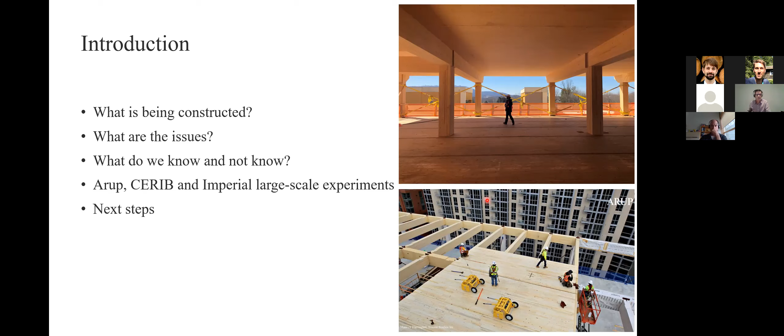So what are we seeing? Well, we're seeing a lot of mass timber office buildings, and I think we're seeing these in pretty much every part of the world. Mass timber has certainly seen a significant uptake in the last 5 years, and that's often to do with sustainability and the desire to have more sustainable buildings. We're seeing obviously a lot of residential, but also a lot more office construction and the desire to have offices with sustainable construction and something a little bit different in the marketplace.

They want to know that it's a timber building, but also want to be able to see that timber. And we know that if we have the timber exposed, we are going to have significant extra fuel, and that is going to impact both the heat release and the decay of a fire if it is to occur.

We know that with large compartments, we typically don't see flashover behavior. So one of the questions for us as engineers, and anyone involved with fire safety of larger spaces where there is structural timber involved, is what is that behavior.

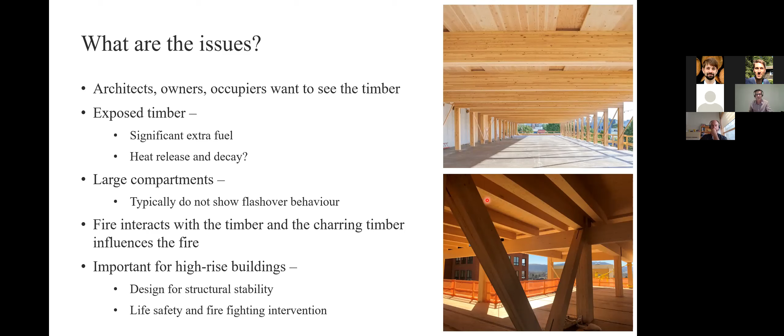So that's a brief introduction to the main issues when looking at mass timber construction, and especially high-rise mass timber construction. What we've seen over certainly the last 5 or 6 years, and potentially up to the last 10 years, is small scale, room scale, and really in some ways large scale, up to sort of 90 square meters, of experimental burns where large areas or significant exposed areas of timber have been involved. We've now got over 40 tests with room or large scale compartments.

Most of these are set up with residential fire loads, different types of ventilation, sometimes walls exposed, sometimes ceilings exposed, sometimes combinations, often mostly with CLT, sometimes with Glulam and other types of timbers, sometimes in combination.

And what we've seen with most of these is very much flashover behavior. The amount of exposed timber has a significant influence on the fire, certainly the growth, and certainly importantly the decay and the heat release decay. The type of timber has an impact as well, certainly where we have cross-laminated timber and issues with glue line integrity, and we see that in the decay phase, and the importance of understanding what happens in that decay phase.

We've also seen that where we want to include the timber, we have to understand that, but where we want to exclude the timber from the fire, we really need reliable encapsulation that prevents that timber from charring and becoming part of the fuel actually burning in that fire.

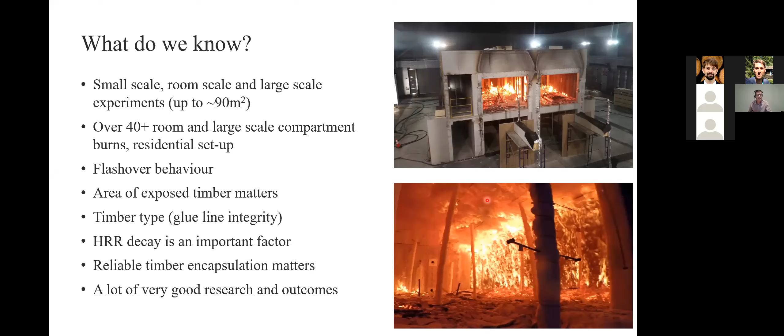So there has been a lot of very good research, a lot of really good outcomes, and a lot of really useful information for engineers, scientists, and anyone involved in research and application of mass timber when it comes to actual structures and fires. But there is a lot we don't know as well, and I think this is important.

This is, in some ways, the important part of where we are now and what we need to be doing: continuing to look at what happens in these larger compartments, because part of the issue is how the fire actually grows in these spaces. For non-combustible compartments, there's been a reasonably well looked at theory on traveling fires and the impact of fires actually moving through a compartment. Now, when it comes to exposed timber, we don't understand whether that theory is still applicable. We have some ideas that it may be, but we've also got some significant concerns with that.

There is quite an issue with how ventilation impacts the actual fire and the spread of fire, and this whole aspect of the decay as well. Smouldering behavior in timber is also something which has not been very well studied, and something we need to understand a lot more of, certainly as engineers and researchers, to apply the engineering, especially where we are looking at taller buildings.

How thermal penetration occurs through timber, and how it is potentially delayed, is very important for vertical load carrying members such as walls or columns. Certainly a very important aspect to understand what occurs, especially in that decay period.

External flame projections we have some idea about, or understand where that occurs, but we need certainly more data on that. We certainly need to understand more about firefighting tactics. There is some good work on that, but again, more would be useful.

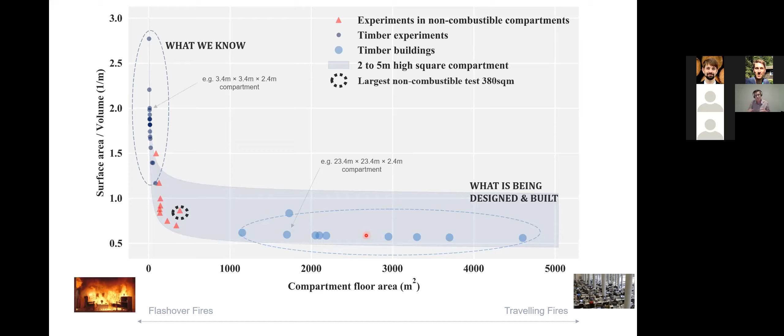But we need a better understanding before we start to scale up some of these tests to be able to take them into what is actually being designed and built, especially when we don't quite understand the issues between flashover fires and traveling fires.

This main issue is part of the motivation for ourselves working with CERIB and Imperial College to fund these large-scale open plan office experiments, because we are interested primarily in the fire behavior. We want to understand how large areas of exposed CLT influence the fire in these large compartments.

What we're also doing with these is there's been previously compartment fires carried out for exactly the same size building with non-combustible ceilings, looking at traveling fires. So we have a baseline where we've got two current experiments, 380 square meter buildings, and understand what the traveling fires were with certain fire loads and certain ventilation. We can use those as a baseline, and that has become the base for these experiments.

The aim of these is to look at the differences between non-combustible and combustible ceilings and understand the difference of where the timber starts to influence the fire.

Also, as part of this, we didn't want to try to do too much. It's important to understand that a lot of other larger scale experiments have taken on a lot of goals, simply because often they've been related to code changes or getting certain amounts of experiments carried out trying to get the most out of them. In some ways, we are very much focused on the fire behavior, and that's important here, the importance of getting the information out.

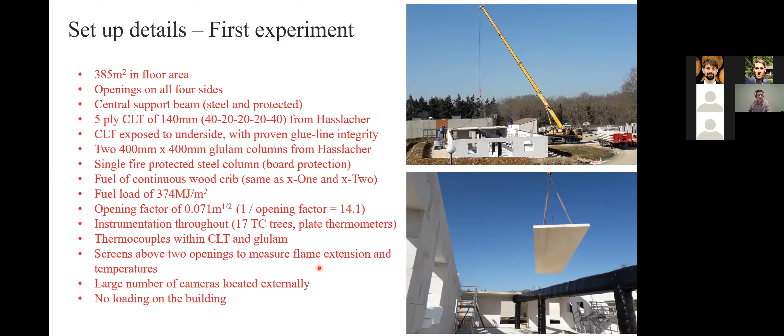Putting it together: masonry walls, openings - as I said, openings at the far ends, and both sides had basically similar openings, with larger openings at one end.

Very, very happy Mohammed today, who in the last couple of days has been awarded his PhD. So congrats to Mohammed, and call out to you, well done.

The wood crib being put together - we had a short area of about 4 meters at one end of the compartment where we didn't have the wood crib, and then the wood crib was continuous all the way down the compartment. That's just the ignition sequencing about to start.

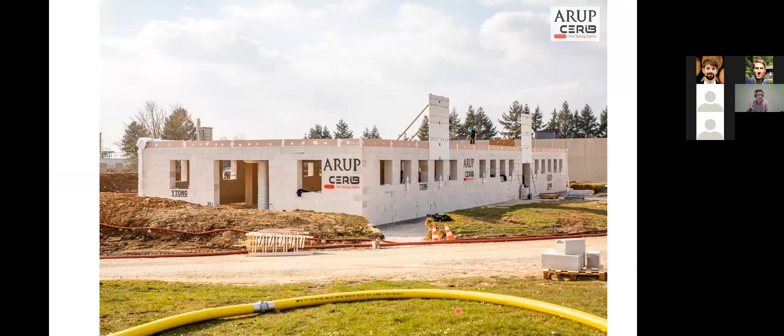That was the building on the morning. Screens, as I said, over a couple of the openings - one over a window and one over a door - to be able to see how the flame projections occurred. CLT in place, and the ignition started at this end. At this end we have a larger opening as well.

In this situation, looking from this point, we have a very well organized wood crib. Its primary aim is to get a lot of heat and get that burning very well, and we have quite a lot of ventilation. The issue is, even before we started this test, there was often a lot of debate around how much ventilation we should have - is this over ventilated or under ventilated? Part of the process here is it's hard to tell - we'll actually carry out this experiment and see how we go.

The actual ventilation for this part is exactly the same as the initial x-One tests that were carried out in Poland, with published information on those. So that was the baseline for starting this test.

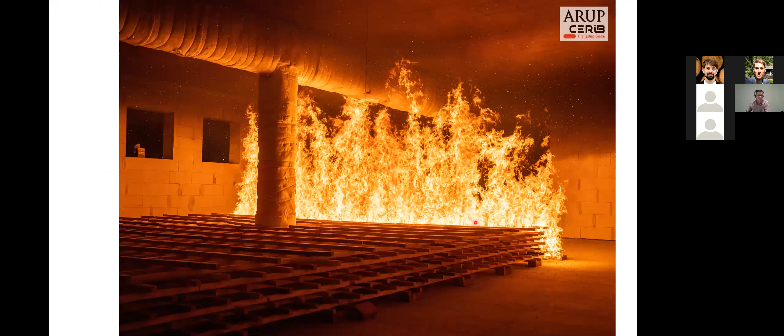Just an image as the fire has just started, and obviously starting to get into the wood crib. You can see the exposed CLT, and this is the protected structure which sits in the middle, allowing the CLT to span the whole way across. This is just a steel beam protected by mineral wool, which we wanted to use for each of the additional tests later on.

Black and white, or quite a color enhanced image through the window - you'll understand why these images were slightly different as we move along. Obviously the plume is just starting to take hold, we've got some ignition starting, and the plume is starting to move down the compartment with just a little bit of discoloration at the exposed CLT. As you can see, the wood crib hasn't ignited at all.

A few seconds later, we've got significant burning of the timber directly above the fire plume itself, with the jet starting to move well down the compartment now. Again, as you can see, no ignition of the wood crib as yet.

A few minutes later, you can start to see exactly what is going on here. We've got full ignition of the wood crib in this area, full ignition of the CLT in this area, and full ignition in this area as well, as the ceiling jet has moved along and we've got preheating - we've actually got ignition of the CLT. Remarkably, no actual ignition of the wood crib along here.

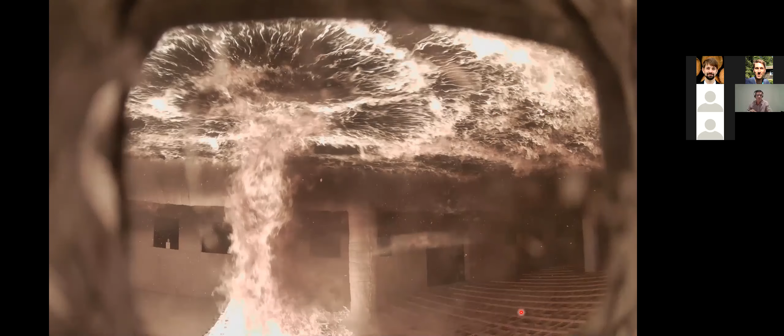Watching this live, we had no idea that this was the actual situation. Our view was that we were getting everything burning at once, and it wasn't until we started to look at this data afterwards, and looked at some of these photos, that we were incredibly surprised to see significant ignition on the ceiling, but also a lack of ignition of the wood crib at this point.

A matter of a minute or so later, we get enough radiant heat in place that the wood crib starts to ignite, and the fire starts to spread and move down the compartment. This initial stage was really interesting, in the fact that we got that spread along the ceiling, certainly a lot faster than we were expecting.

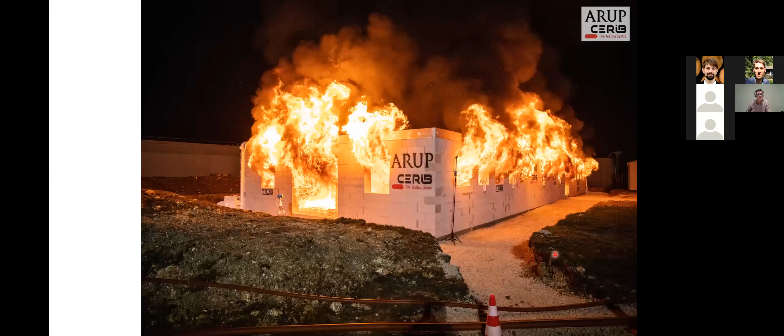Just as an image back from outside, within about 5 minutes of ignition we had pretty much flashed over the whole compartment — this is a 385 square meter compartment. You can see the wood crib burning, and the whole compartment completely flashed over with everything burning. We were not expecting that completely. We expected some form of continuous fire, but to get to this point was certainly surprising, and also interesting from the point of view of how the fire actually developed and continued to grow in this space.

A few more minutes further along, ignition has occurred at this right-hand end, and we're starting to get some decay in the fire at this end, at the other end of the building where the fire has moved down to. We've still got, in some ways, full development of the fire and somewhat flashover conditions at this end, with full flame extension and the fire completely engulfing every part of the structure.

Just an image inside showing the wood crib starting to burn away, starting to be consumed. There were two timber columns — one located centrally, and one located more towards one end. Part of this was to understand how these columns actually responded, which is quite an interesting aspect in itself, looking at the timber columns and how they responded to the fire.

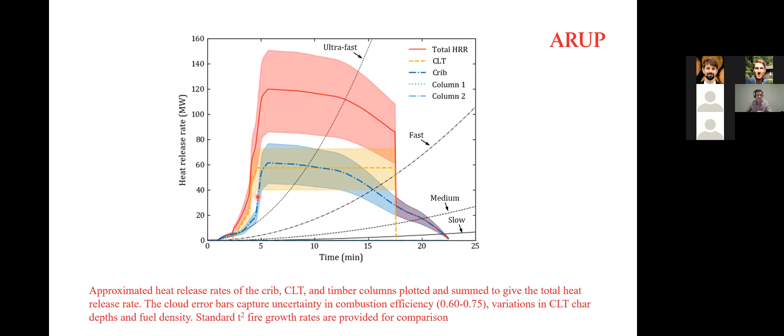Interesting enough, as far as fire growth goes, we plotted the T-squared fires here — the ultra fast, fast and medium type fires — and you can see we got very fast growth. We have to be pretty realistic about the fact that we had, in some ways, a perfect fuel, and very good openings which were open right from the beginning of the fire. So we were expecting to get very good growth with regard to the speed of the fire. That certainly did occur, and it's very evident that when you have exposed timber and the right ventilation conditions, you will get very fast growth.

As far as temperature goes, just a quick snapshot of the temperatures over a short period of time, from 5 minutes to about 6.5 minutes. This is along the centerline of the compartment, and you can see snapshots of the flaming occurring at the same time, along with the temperatures moving through the compartment.

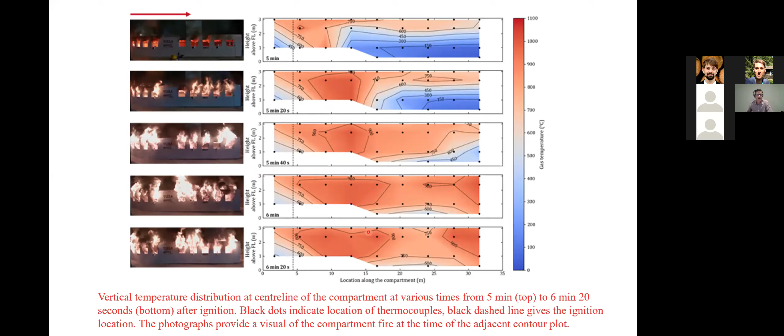We have a situation where we don't have enough ventilation in that space, and this is one of the aspects we looked at and realized that even though it was a very well ventilated compartment, there certainly wasn't enough ventilation, and we are getting a situation where the temperatures are peaking in an area which is slightly below.

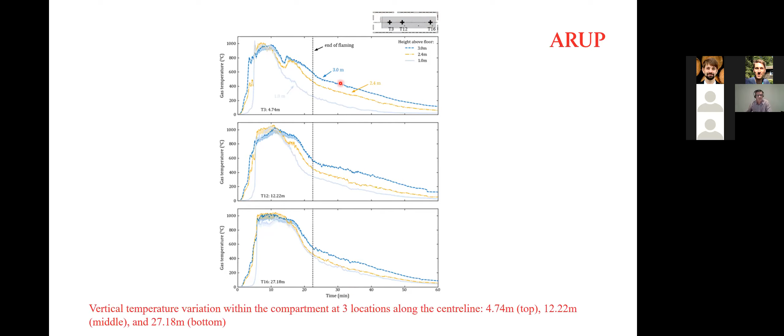Another interesting aspect is that at one end of the compartment, we've got quite a reasonable separation of temperatures between 1 meter height and 3 meter height, with in some ways a 2-zone approach. At the far end of the compartment, near the ignition where flames move in this direction, that separation doesn't really occur, and we've got fairly consistent temperatures across the whole height from 1 meter to 3 meter. Decay rates are similar, but that separation in temperatures is quite different along the actual compartment.

So what's next, to wrap this up: we're in the process of writing a paper which we'll publish, providing results on what we've seen so far from the first experiment. We're then looking at separate papers to dig into more detail on some of the other issues we want to explore.

We're in the process of setting up for our second experiment, which will occur in the next 2 weeks. A lot of work is going into getting that ready and prepared. We're basically having exactly the same situation but with half the ventilation, primarily knocking out every second window or every second door, with everything else identical. So it's all about understanding the impact of ventilation on those fire dynamics and comparing the two. At the moment, this is supporting 2 PhDs at Imperial.

We are considering a third test and trying to understand what that will consist of and what will be important for that. I think that will depend on what comes out of the second test, as to how much we need that third test and what the variations will be. There's certainly a lot of work to digest, and we're considering continuing to work on that, and we will be for quite a period of time as we move forward.

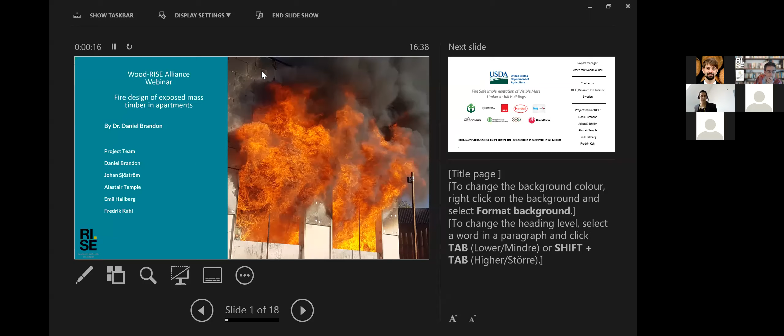Let's see, I see you. Yes, can you hear me? Yes. Good, can you see the screen? Yeah, but I see this in presentation view or speaker view, with the next slide—you have to click something. Yes, it should be fine now, right?

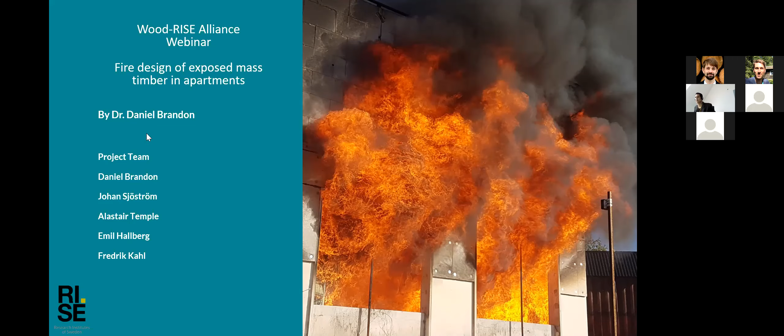Looks great. Good, thanks. Thank you, Pierre, for the introduction. This presentation will be about fire design of exposed mass timber, and I will focus on apartments, in relation to the previous presentation. We did aim to get knowledge for office buildings as well, but the focus of this presentation is apartments. I am presenting results of a project, on behalf of the whole project team.

The project I present results from is called Fire Safe Implementation of Visible Mass Timber in Tall Buildings, funded by the US Department of Agriculture, US Forest Service. The project manager is the American Wood Council, and RISE is the contractor. We have material sponsors: Katerra, KLH, Henkel, USG Knauf, Boise Cascade. We got additional support from the Softwood Export Council for transporting products from the US to Sweden. We also received financial support from Brandforsk, the Swedish Fire Research Association, which paid for additional measurements outside the compartment and analysis of that.

On this website we publish all information. At the moment we just have the summary report. The final report is coming soon, and we'll have other reports, one about predictive modeling and another about repairing fire damaged CLT, a case study of repairing.

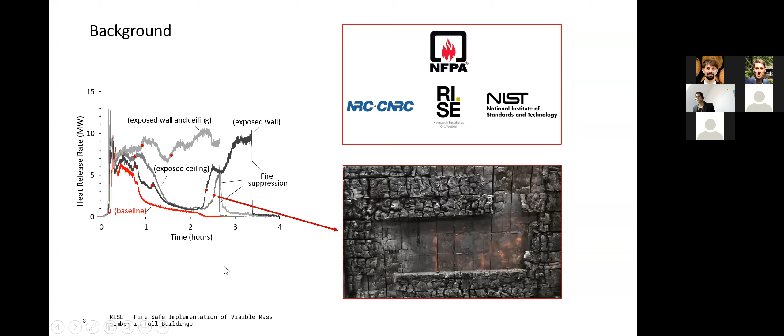By now there are some standard tests in the US and in Canada. There is a requirement for CLT to withstand a full-scale compartment fire test without reheating of the fire, required in ANSI APA PRG 320 since 2018. In Europe, we can expect a standard test in one of the annexes of the next Eurocode 5. Both of these tests aim to avoid glue line integrity failure, and that would change the interaction of the timber with the compartment fire significantly.

That's why we conducted these compartment fire tests. The main objectives are to design and perform five compartment fire tests with PRG 320 2018 compliant CLT. This standard has a test that aims to rule out glue line integrity failure. We performed these compartment fire tests with a varying amount of exposed mass timber areas.

We assess these fires against a performance criterion where a fire should decay from the onset of decay until at least 4 hours after ignition. This assessment criterion was also used for previous changes in building codes, and therefore we thought it was good to implement it in our research as well.

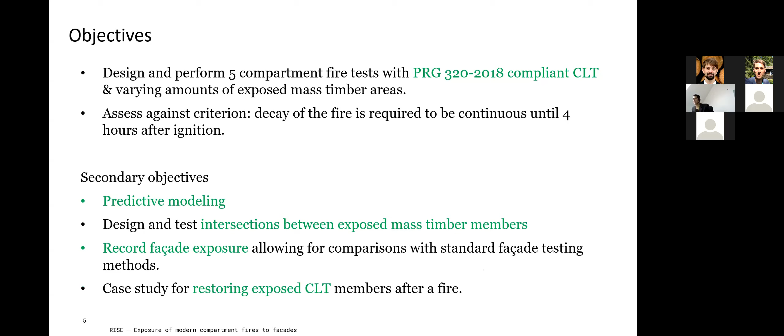Going one slide back, the main objective is to design and perform compartment fire tests. The first step of this is to design the compartments. In this study, we aim to get a severe but realistic scenario. As David already said, ventilation is a very important parameter, and for this probabilistic study we did a survey of which opening factors, which ventilation openings, you could expect during a fire.

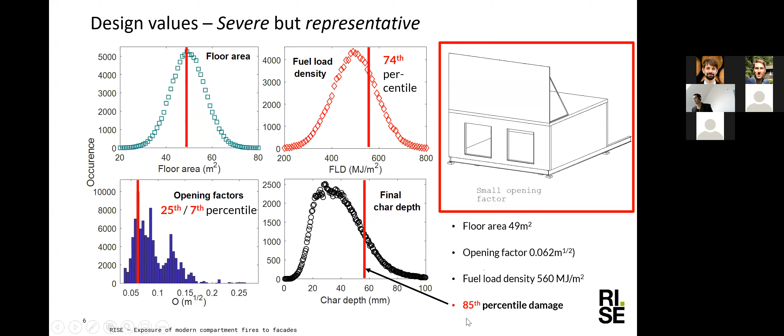We looked at modern multi-story buildings made of all kinds of materials, but also specifically an additional database on timber buildings. We got the distribution of opening factors that we could expect. In the probabilistic analysis, which I cannot go into detail on today, we aimed to get a higher percentile expected damage in relation to the range of modeled fire scenarios, using 200,000 modeled fire scenarios with a relatively simple model. Using this probabilistic analysis, we aimed to select a scenario that would lead to relatively severe damage.

That analysis resulted in a smaller opening factor. We also included a test with a larger opening factor, which would correspond much more to open office spaces in the database. So the purple distribution of opening factors corresponds to office spaces, and we can see that the range is much higher than

These are the configurations of the tests. There were several different areas of the structure protected and different areas exposed. In all tests, we had an exposed CLT ceiling and an exposed beam, a Glulam beam underneath the ceiling.

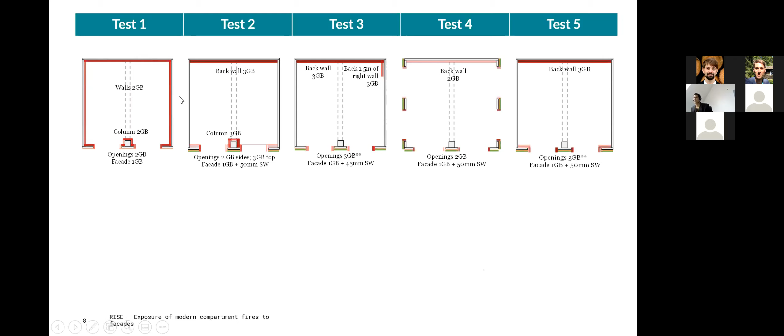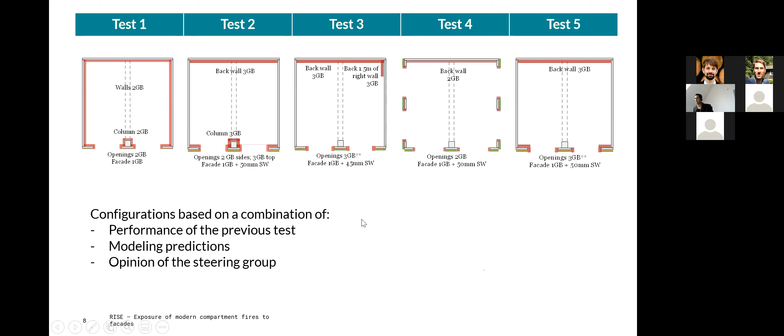We had varying numbers of layers of gypsum boards, and the one test that we did design in advance is test 1. All subsequent tests were designed during the test series based on these three things: the performance of the previous test, modeling predictions, which has been quite useful and reasonably accurate. Then also discussions with the steering group have led to the decision of which configuration had to be tested.

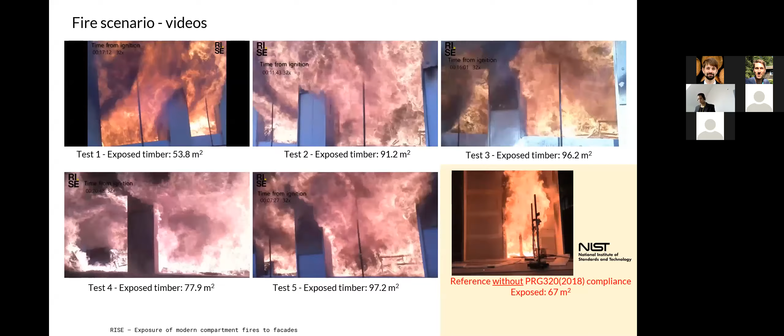Here we see all fires from flashover, from the start of flashover. Test 4 decayed relatively quickly. That is due to high burning rate, but also a lot of cooling effect due to larger openings, which does correspond to our data from office spaces. Then we have test 1, where the ceiling and the beam was exposed, and thereafter 22 minutes of flashover, the decay started, and that took 6 to 9 minutes longer for test 2, 3, and 5, which had significantly more surface area exposed.

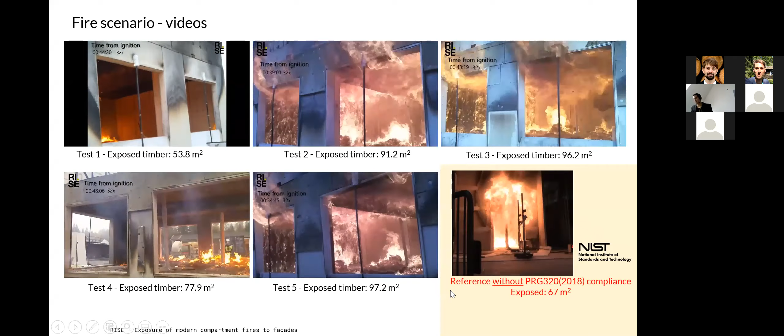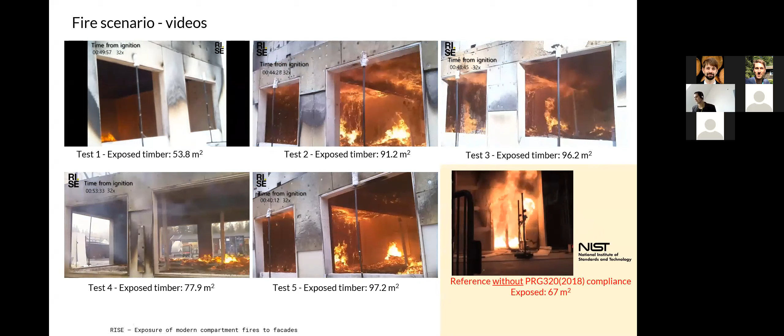As a reference, I included the test done at NIST, and these videos are also made by NIST. This compartment, which I discussed before, had CLT that is not compliant with PRG 320, and fire bond line failure was seen in 2 layers in this test.

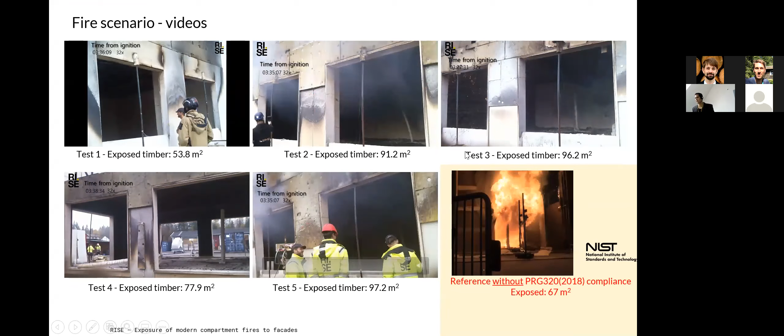Now we go to the end of the test, and we see that test 1, 2, 4, and 5 decayed. They decayed until the 4-hour mark. In test 3, we had reheating of the walls, and despite the similarity between test 3 and 5, there was a different outcome. The significant difference between test 3 and 5 is that in test 3 we had exposed wall corners, exposed walls intersecting at a corner, and in test 5 we didn't have that.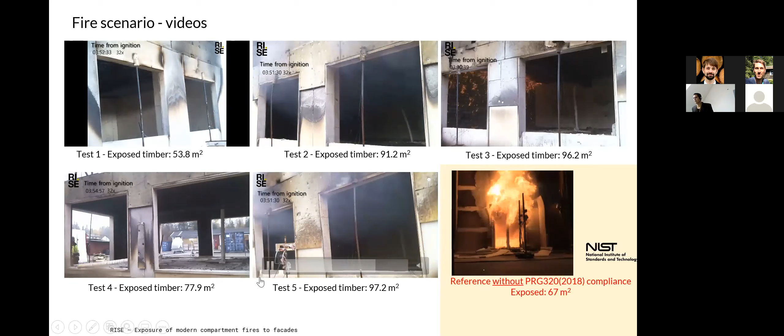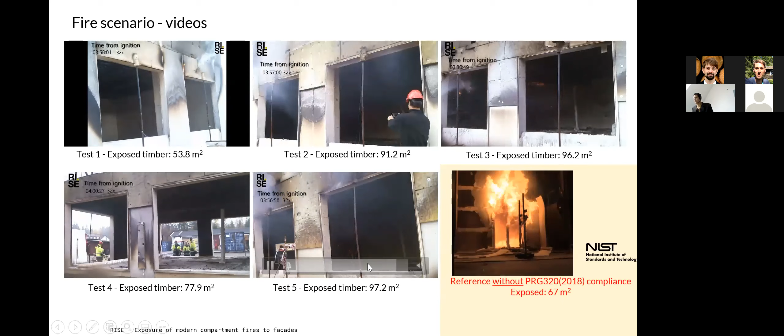In this corner we saw, in test 3, in the bottom of the corner we saw increased damage. In test 5 that was not the case, and all corners in test 5 had at least one surface of gypsum board protected wall. As a reference, I included this previous test with CLT that doesn't comply with the current PRG 320 standards, and you can see that it has a significantly different outcome.

Just to emphasize that there was a significant difference in terms of where the CLT surfaces were, and we have seen a lot of signs of the walls in the corner at the bottom re-radiating to each other in test 3. That wasn't the case in any test where at least one wall was protected in a corner.

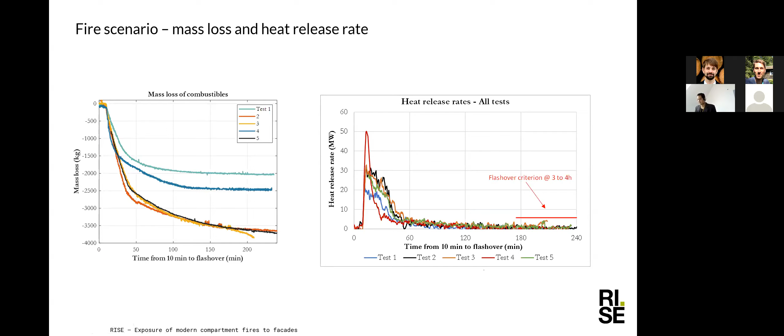Some results: we determined the mass loss of the floor. We determined also the mass loss of the compartment itself, everything except for the floor. The idea was to get information of the mass loss of the fuel load on the floor and the mass loss of the structure separately. We calculated the heat release rates based on the heat of combustion of the fuel, and that is shown here.

We also measured the internal conditions with multiple devices, thermocouples, but also plate thermometers. The plate thermometer temperature is often used as a proxy for thermal radiation, which is actually the most significant mode of heat transfer at fire temperatures.

Here you see the charring depth in the ceiling after all tests. It should be noted that the char depth in the bottom of the compartment was generally higher. However, because the ceiling was exposed in all tests, it allowed for a nice comparison. This is actually the best comparison we have when it comes to char depth of all fire tests.

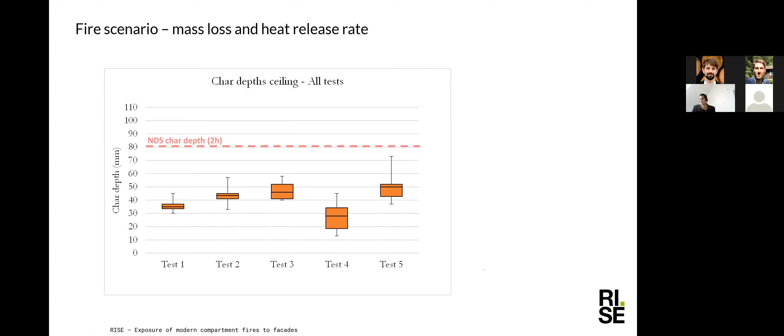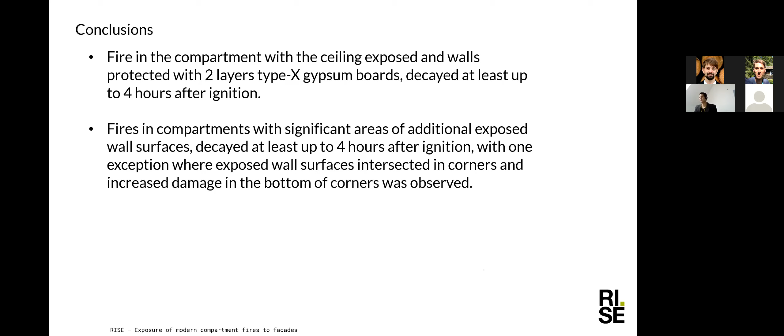That was a very short, brief selection of the results. The conclusions related to the results I showed today: the fire in the compartment with the ceiling exposed and walls protected with 2 layers of type X gypsum boards decayed at least up to 4 hours after ignition. Fires in compartments with significant areas of additional exposed wall surfaces decayed at least up to 4 hours after ignition, with one exception - test 3, where we had exposed wall surfaces intersecting in multiple corners, and there we saw increased damage in the bottom of the corners.

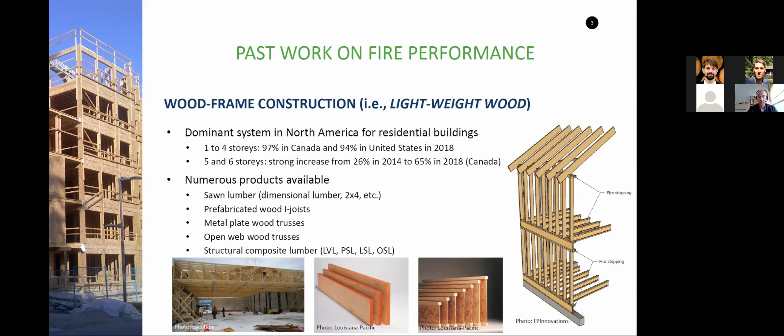There has been a long list of tested assemblies, either wall or floor, that has been exposed to standard fire exposure. I'm using ISO 834 as the reference, but other countries have other standards for fire resistance. There has also been some compartment fires to assess the fire dynamics in this kind of construction. All of these tests have allowed us to evaluate the effects of various design parameters.

Wood frame construction is not necessarily a very complicated system, but we wanted to know the effect of the gypsum board - North America would be type X, European would be type F, or some other classification. The tests have allowed us to understand the effect of, for instance, resilient channels on the performance of the gypsum boards, and also the insulation, namely for wall assemblies where insulation plays a significant role. From all these tests, what we know is that wood frame can provide significant fire resistance way beyond 2 hours, and there have been a number of tests to demonstrate that.

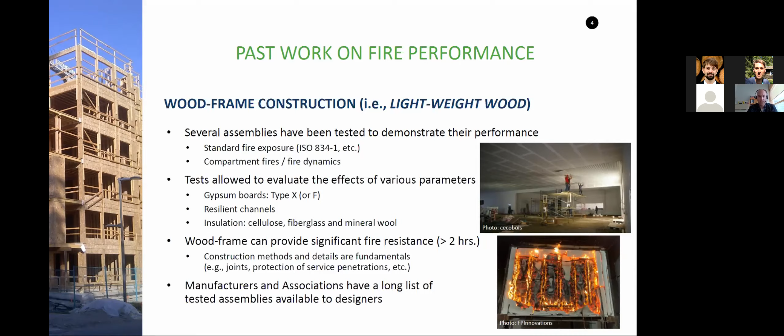Essentially, manufacturers of wood frame assemblies and associations have all of the tested assemblies available to designers. It's just a matter of asking, and they will be more than pleased to share the info with you.

All of these tests have allowed the development of a number of calculation methods over the years. In North America, we have what we call the component additive method. This method is currently limited to 90 minutes of fire resistance, and it essentially consists of adding the contribution of the various components - you add a time assigned to a gypsum board, the time assigned to the wood joists or wood studs, and a time contribution for the insulation, and the sum gives you the fire resistance. So it's really straightforward and easy to use.

There also has been a model developed in Eurocode 5, published in 2004, and section 5 specifically deals with wood frame. The method there is limited to an hour, to 60 minutes, and it allows you to determine the load-bearing function or separating function. So Eurocode 5 has quite a bit more sophisticated approach, so that you can really evaluate whether the load-bearing or separating function is needed.

The other type of system I'm presenting here is post and beam construction - perhaps more of the traditional system that we used to see - and also mass timber, which is more of the trend now related to timber construction, especially in the case of tall buildings, which would use mass timber construction.

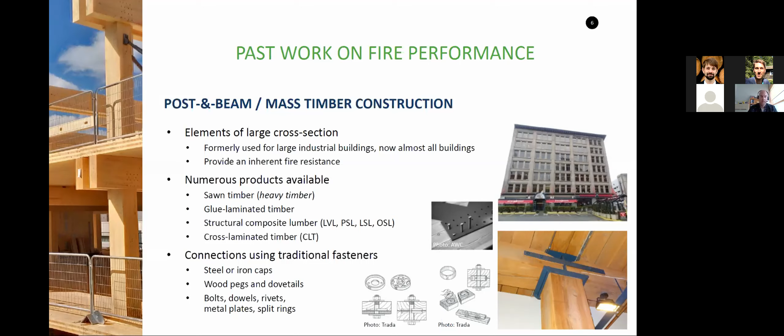This type of system also uses connections that are, I would say, more traditional fasteners. We've seen steel and iron caps, as you see in the picture at the bottom right. We have seen wood pegs, dovetail connections, bolts, dowels, rivets - so all of these, I would say old school, connection types have been used in this category.

Again, similar to wood frame, these products have been tested for standard fire exposure. There have been some compartment fires to assess the fire dynamics and the exposed surfaces - David and Daniel just presented the latest info. All of these tests throughout the years have allowed us to develop a lot of parameters.

Obviously the first one that comes to mind is the charring rate. There has also been a long list of studies to assess the effect of density, moisture content, heat level exposure, as well as the thermal gradient inside the timber once it's being charred.

There has been some work to develop thermal properties - these are mostly used in advanced modeling, like finite element modeling - but at least there has been some work to derive those properties, which are not really obvious because at 300 degrees Celsius, everything is consumed, so it's difficult to develop properties beyond that.

We also have a long list of combustion properties - ignition temperature, ignition time, pyrolysis, mass loss, heat of combustion, smoke, and different other types that could, for instance, come out from the cone calorimeter test.

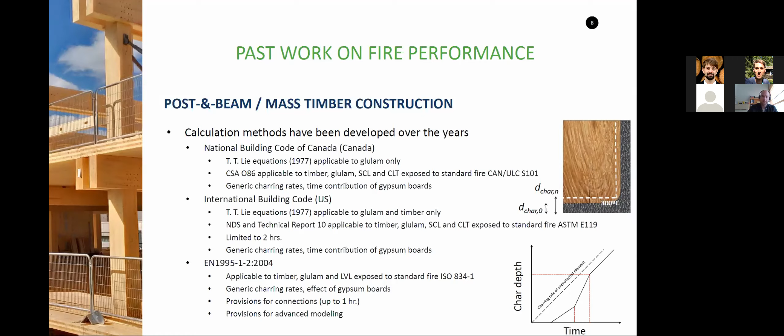So those were where we came from and what we know. Now, what we're currently working on for the past few years, and most likely a few years after, is to continue to study the fire performance of different other types of products and systems. There are and will still be new materials and systems being developed, so we need to know essentially all of their fire performance, whether it's combustion properties, fire resistance, flame spread, whatever. There will always be a need to evaluate these new materials.

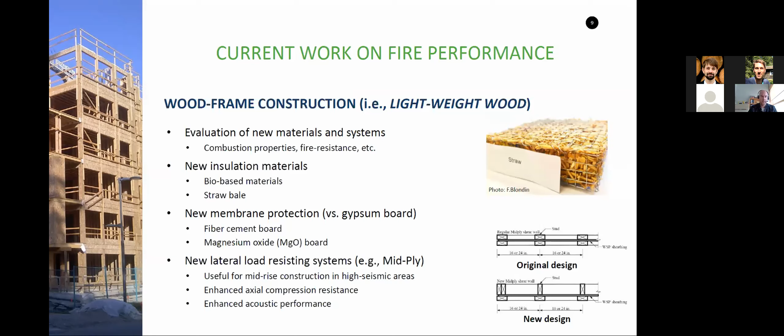With the push to 5- and 6-story wood frame construction, we also need new lateral load resisting systems. One example is the mid-ply shear wall that FPInnovations developed a few years ago. This type of shear wall, as you see at the bottom right, allows the shear membrane to be solicited in double shear, which increases its capacity. So it's useful for higher buildings, or wood frame buildings that would otherwise be in high seismic areas. We changed the configuration of the wall, so we need to focus and test the assembly to assess its performance.

What we're also seeing in the market is a change in wall assemblies to meet various types of demands. The change that we're mostly seeing is the need for energy efficient exterior walls.

So something that would either be thicker cavities, more insulation, or insulation outside of the wall as opposed to inside. That changes the overall performance and also needs to be assessed as to what is the effect from moving one component elsewhere across the wall assembly.

We also see high capacity walls for compression loads. There could be staggered stud, so not a standard one row of stud. We could see walls with engineered wood-based stud, like structural composite lumber, which has not been tested per se, so we need to know if there is a difference. And some walls with enhanced acoustic performance, so maybe now new assemblies with gypsum membrane or other types of membrane, but that are not necessarily the traditional gypsum board and resilient channel.

From all of these recent trends, this has led to refinement of existing methods. I would say for now, the most change will be coming in the Eurocode 5, which should come out somewhere between 2025 and 2027. There will be a significant change in this method, and Joachim will present more details later. One of the major changes is you will have thermal properties for insulation materials and gypsum board, which were not in it before.

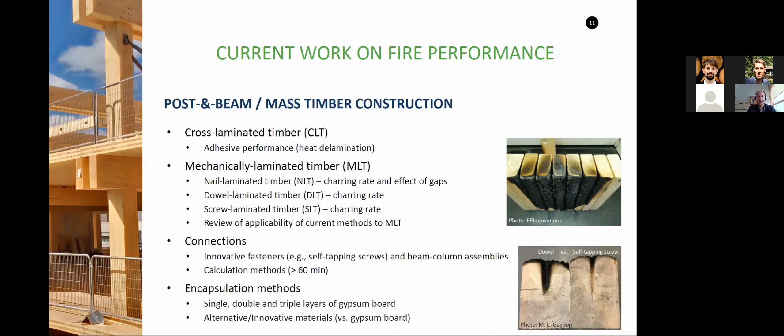Also current work, compartment fires. David and Daniel have presented some of the ongoing or almost finished compartment fire work, but there has been significantly more testing in the past few years that was not necessarily presented in this webinar.

We're also still doing some testing to see the effect of non-delaminating products. Most of the previous tests on compartment fires were, as one commenter pointed out, made with CLT that exhibited delamination, and now we want to see what's the effect of the non-delaminating products.

Fire safety engineering work is ongoing. The important thing for now is to see whether the general principles of fire safety engineering are applicable to timber construction. David alluded to the number of uncertainties that an engineer wants to get rid of. So what needs to be done to make sure we eliminate these uncertainties?

One priority is to continue developing thermostructural models. For now, what we've seen is usually sequential coupling: one does the thermal model to see the heat transfer inside an element, then puts those results into a structural model. Two-way coupling is different and more sophisticated, but the sequential approach is reasonable for now. These models are usually for single elements like a column or beam, with some modeling showing connection performance as well.

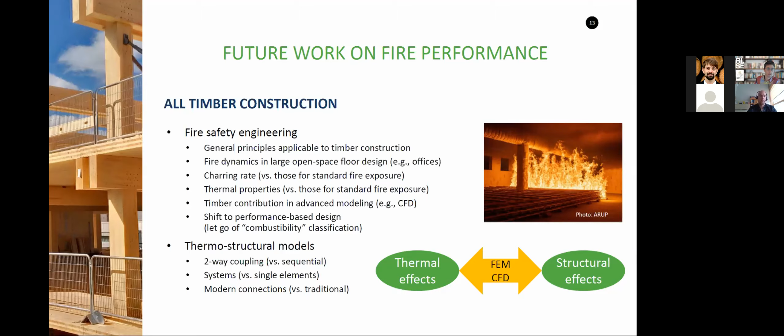Future work also includes modeling - I'd say now two-way coupling, so that at every time step thermal and structural models talk to each other. Also, we could look more at a system approach as opposed to an element approach - how a beam and column interact together, or maybe a full compartment that could be modeled. And also modern connections - there are tests demonstrating traditional fasteners, bolts and dowels, but now we want to know more about modern types of systems.

Please, Christian, we are running out of time. Yep, that is my last slide, Pierre.

And lastly, still of great interest these days is fire safety of facades. What test method should we use? There's a number of those already in place in many countries. And what would be the risk mitigation strategies for these facades?

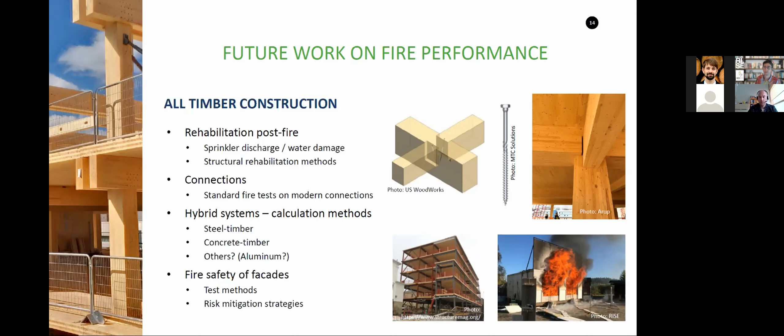In conclusion, I'll stick to the main points: wood frame construction is very well understood. Post and beam construction and mass timber is relatively well understood for now. But there are many key aspects still misunderstood by the design community, whether building officials, firefighters, or insurance companies. Performance-based design is gaining popularity, and timber design needs to fit into performance-based design like any other material, so we need to develop what's left to support that approach.

Yes, so I was asked to present something with respect to compartment fire design in Eurocode. And I took the opportunity to show you the current status, a comparison with the actual version and the coming version. Unfortunately, I have to inform you that we have to wait some more years. The Eurocode in its next generation is to be confirmed and approved 2025 to 2027.

So let's wait some more years. But I think the draft is spreading, and I think why not use it by now? So let's start. In my presentation, I will go through the evolution of Eurocode and show you some of the differences. I will give you a design model overview when it comes to fire design.

And we will have a look at what's available and valid also for timber. Then we will have a deeper look into the consideration of structural timber. Why should we do that, and how can we do it? I will give you some insights on the physics and how we want to apply that. And close to the end, we will have some application examples.

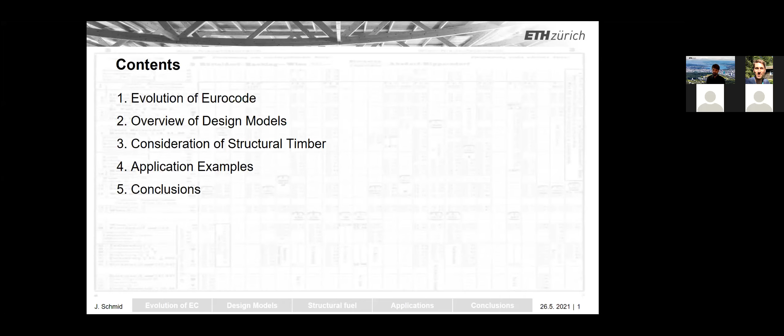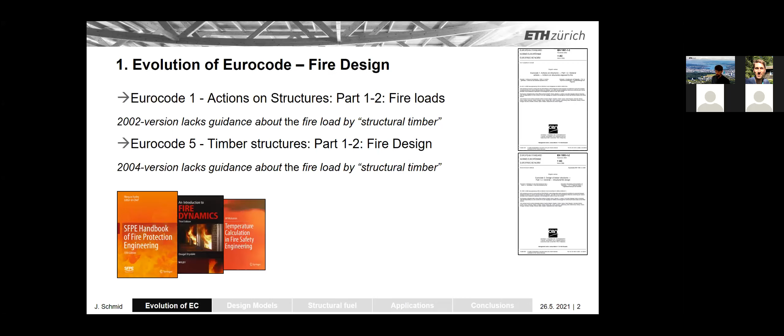So when we have a look in Eurocodes about fire design, and we want to know more about the structural fuel load by structural timber, then we will find in Eurocode 1, which should be our first knowledge point, that we do not have anything there. It said please consider fuel if it's the interior or the structure. However, also Eurocode 5, same sentence, just a different release date. There's no guidance given about how the fuel by structural timber, or the structural fuel as I call it, can be calculated. So the only option you have is to consult guidance documents, books for fire in general, or well available information about how timber reacts and behaves in fire.

And there is still a web page open for the COST Action, the previous one now finalized already for 2 years, but content will be extended and also transferred to another web page called Fire Safe Use of Wood. So I will invite you to check sometimes when and where we will do some updates. I would also refer to a Canadian handbook, which is quite useful, and some very recent research done in UK with the STA group.

Now, evolution of Eurocodes. I told you Eurocode is a very good tool, but it should solve everything, and this is in fact at the moment expected from Eurocode. You should deal with timber frames, post beam construction in rectangular shape, irregular shape, and also CLT. However, to be honest, CLT was not really included in Eurocode, and partly rules have been incorrectly used and applied on CLT. But this is now to be solved and becoming much better in the next version of Eurocode.

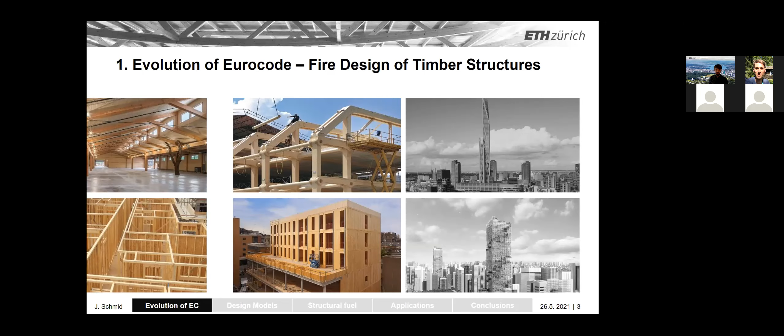What we will not do, and will Eurocode never deliver, is clear rules how to build a skyscraper out of wood, because for that you need special expertise, which is also valid for complex and larger structures. But guidance on about 80% of the buildings should be implemented in Eurocode. And that was also the task of the project team where I was a member of when we did this writing of the Eurocode draft, which exists now.

Having a look at that and comparing it to the old version. So 2004 is the old version, and 2025, I'm quite an optimist, that is the new version. Looking at the page numbers, I could identify some interesting spots here, and that is one, the mechanical resistance. It grows because we have now more products involved, CLT, quite a large chapter, but also more small elements, I-joists, which have not been involved or incorporated in the 2004 version, that is now covered.

On the other hand, and that will be the content of my presentation today, the next slides, is non-standard fire design. This means that not everything is invalid for non-standard fire design, but most of the design is expected also in the future to be done for standard fire. For example, detailing will be an issue for any of the design. And also external flaming, which is a new chapter, is probably something everybody will be interested in.

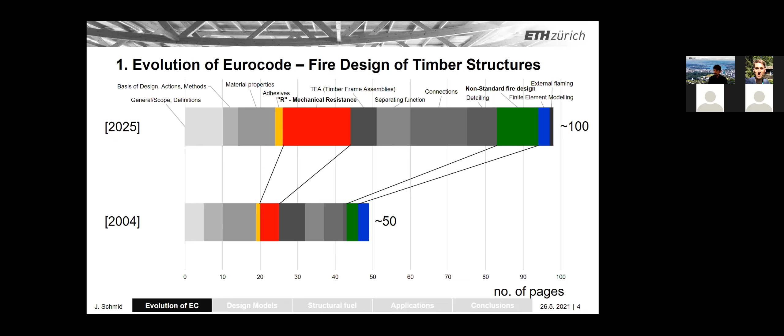Having said that, I would like to point out that Eurocode is just one piece of the full picture you have to consider, or an engineer should use and take into account when designing a building or doing a member verification. There's still testing around, and more importantly, there's still these building regulations you have to follow, where you will find proper guidance, hopefully. And if not, you can consult similar papers and manuals given by the associations of timber industry in your country or also abroad.

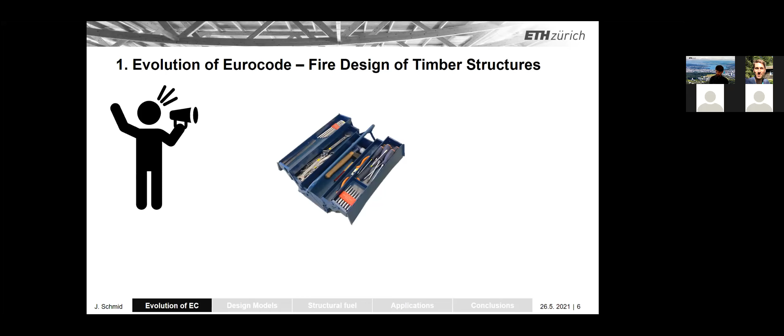Now, reporting from the project team dealing with the draft of Eurocode: we were given the old Eurocode with some tools, and we were also addressed by wishes that everything should be more accurate, everything should be more easy, and all models should be fit for the future. So it was a difficult task, but we did our best in rearranging tools and putting more tools together, and these tools can be used in the future by engineers to answer questions—not all of them, but more and more. I think they are good tools, and I'm very happy to present Eurocode very soon to you. Please send comments to WG4 if you are not happy and see some further room for improvements.

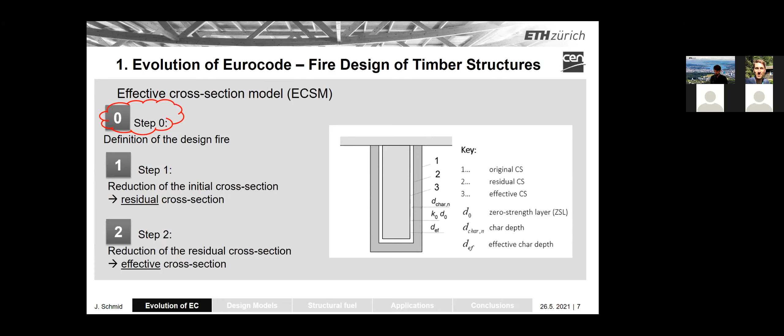So what is now the focus of my presentation is a so-called step 0. Before doing the known steps 1 and 2, we need to talk about the definition of a design fire. In the majority of the cases, the standard fire still applies. But for these other 20% I was mentioning before, for larger spaces, for more complex spaces, for taller buildings, we need to talk about the fire scenarios. And there is a lack at the moment of knowledge, education, but also guidance. I will give you some here in this presentation.

Overview of design models—I promise I will address some at least. Looking at the evolution of general fire design models, not only for timber and especially not for timber, we could see this evolution. It started from 1900, where it was not known that there are different fire temperatures. I think there was a very odd number that people assumed, 924 degrees Celsius, as the fire temperature. But finally, standard fires were found, defined, and later modified to parametric fires.

Zone models were introduced, more for energy balance solving. Then we found that there could be a localized fire that might be traveling through an open space—my colleague presented some before, Dave. And today, I think the top of the evolution is fluid dynamics, which have been found reasonably interesting also for fire. However, when it comes to timber now, we rely very often still today on this ISO EN standard fire. I will come back to that very soon, for one more slide.

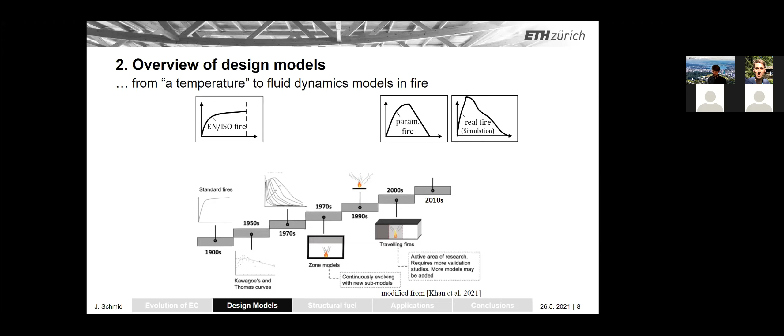Now, talking about Eurocode work, it was not only writing the Eurocode, but we had also to deal with side topics. One of these side topics was the applicability of standard fire furnace testing for timber products which are combustible. That was not an easy task to do, but I can already tell you: it is still applicable. It depends, however, on what questions you want to solve.

So until the 1980s, we tested a lot of linear members, columns and beams, and people were very happy with that. But in a bigger environment or a compartment in general, they do not contribute to the fire as a larger member would do, like a CLT member, where you have an entire ceiling or a wall exposed.

Those elements affect the fire dynamics in a compartment, whether it is a room or a furnace, like you see here. So the question was, can we still use it? And the answer was yes, but just for certain things like load bearing capacity and charring, but not for the assessment of the question: does it burn out? Will we expect burnout, and how long will the fire be, or will it be longer? Or will we have external flaming like you see here on this picture?

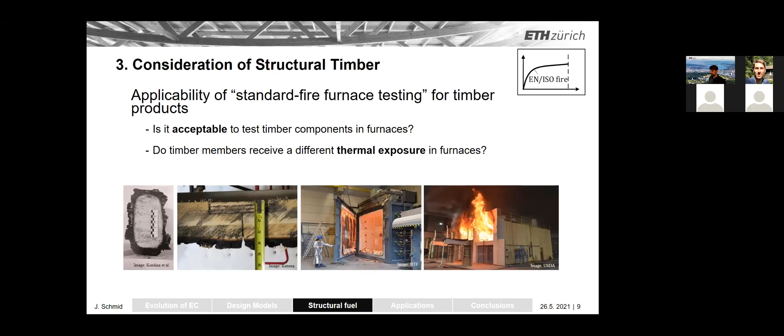But people were then saying, well, rather do compartment tests. And we have seen a lot of these compartment tests. Looking into these compartment tests, I will later on show you the same graph that Dave showed you. We cannot always do compartment tests because even these tests are probably only one fire scenario, while slightly different ones will lead to other questions.

Now, looking into the parametric fire design of Eurocode, it's implemented in Eurocode 1 with a connection to Eurocode 5. Looking at the chart shown here in the background, it's just 20 equations you have to sort together, which can be summarized to only these elements. In a direct application, it takes just 5 minutes to calculate this fire's charring depth for the parametric fire. However, this is not possible and not valid, because it's not true that the assumption can be made that structural fuel load is already considered or automatically implemented in this procedure.

An alternative or an improvement would be that you consider the charring depth relative to the fuel load. We will go to that point a little bit later, but I need to speed up. I see my time is running.

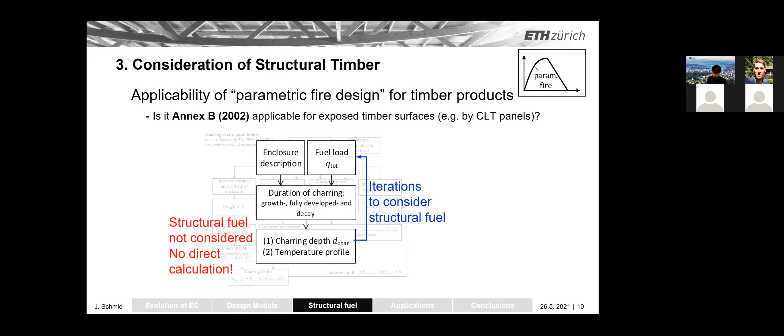So the question was, how would a timber member behave in natural fires? Let's have a look at the assumptions we always make and what is critical about it. When we have a non-combustible environment shown here, you will have the movable fire load burning and you will have a certain amount of external flame. Now we change some elements in this compartment: we will get increased exterior flaming, we will still have this movable fire load I referred to earlier, and we will get some charring, and that volume would represent a certain amount of additional structural fuel load.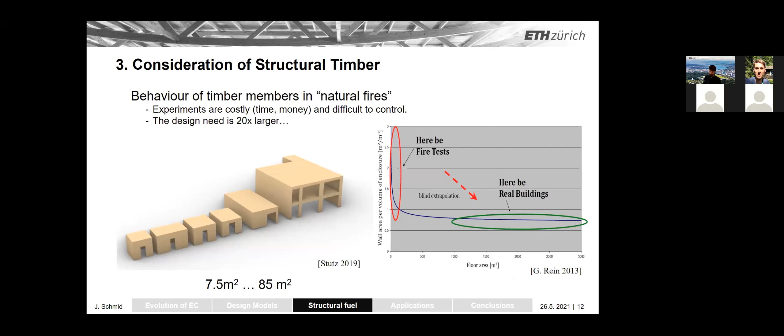Yes, we could do a lot of further tests, but we don't have money for that, and neither do we have time, as you have seen. Unfortunately, most of the tests are very small, but we want to extrapolate to very large compartments. Looking into literature and existing research, you can find some very interesting points.

One is the first test of a series done at VTT, where Tuula found that, interestingly, only a certain share that you would expect to contribute to the fire is in fact measured as total heat release rate. My colleague, previous colleague and still good colleague at RISE, was the first one to put down an equation which describes more or less exactly this behavior. He said that the contribution of structural timber can be described by the charring rate, by an energy release developed by the cone calorimetry, and a so-called fitting factor from compartment experiments.

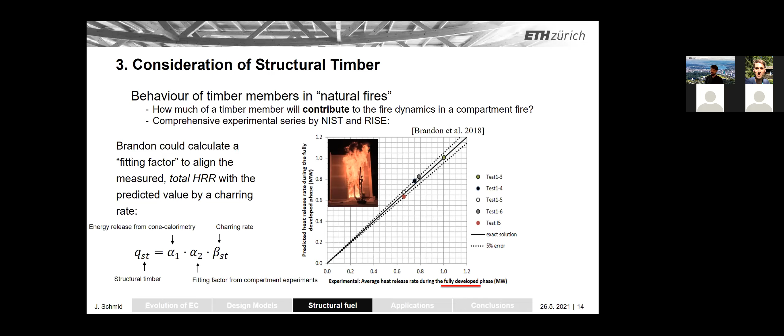That means that not all of the energy embedded in the timber will be combusted. However, unfortunately, this is strictly speaking valid only for the steady-state, fully developed phase. The question is, how can we work with that? And here comes the most critical and complex slide with some equations.

So taking now this equation from Daniel, we got comments in Eurocode. Well, we fire scientists always talk about embedded energy and mass loss rate. So, okay, let's take this one and consider now timber as it really behaves. That's why I call it combustion behavior.

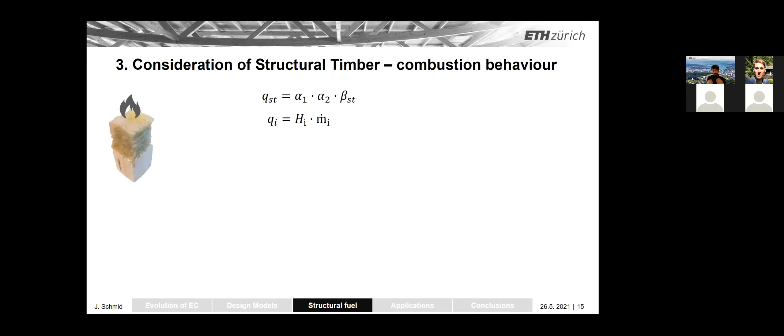So I invite you now to make a little shift from whatever people told you in the past, and add some elements. People told you the char layer is good because it will insulate your wood from the compartment. However, in fact, you always have to consider that this char layer is also an energy source. By this energy source, you will have a certain contribution to the charring on one side.

And on the top side, you have the energy release to the compartment. We can describe this behavior by the mass loss, which is a measure of the material conversion from wood to char, and also a measure of the combustion of the char layer. And if it decays, then we also have decay in our compartment.

Getting more deeply into these equations, we can describe the combustion by accounting for pyrolysis and oxidation. Strictly speaking, we could say quite offensively, timber doesn't burn, it is the char that does burn. So the equation can be extended: we convert wood into wood and char, and finally we combust the char in an oxidative process. That is this decay of the char layer I was talking about.

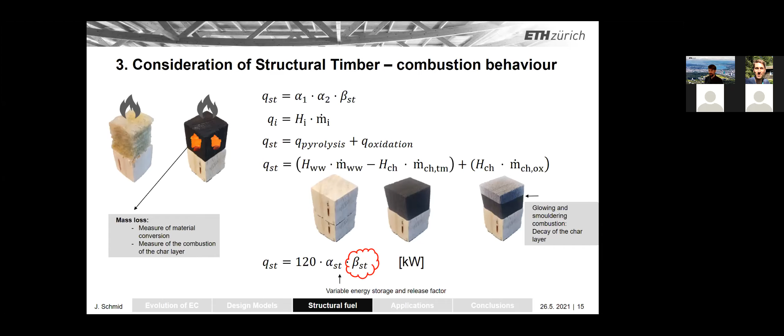Now that was quite the theory. Going back to Eurocode, we try to make it very simple. We say the combustion can be described with a constant derived for structural wood, based still on the charring rate in kilowatts. So we have 120 kilowatts per square meter per millimeter of charring. And then there is this difficult factor to explain - I'll do one more slide on that.

So the alpha ST value, what is it? We assume we have one material, wood, our energy source. We have char, our energy storage. In a combustion process, we convert material 1 to material 2. Some of the heat is released directly. The majority is temporarily stored in the char layer and later released, to a reduced or increased extent. This is the factor alpha observed by Hakkarainen and Brandon, and now implemented in Eurocode.

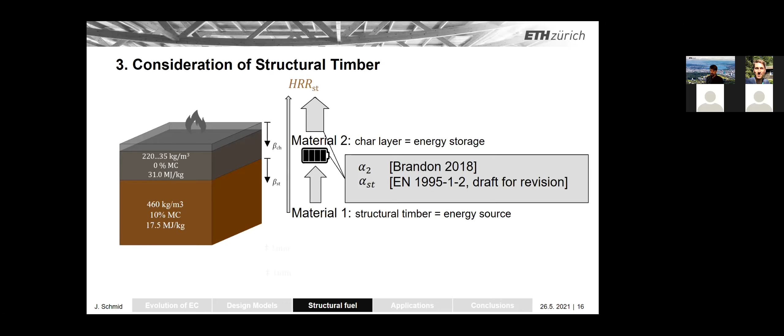So I worked the last 5 years developing a model describing this combustion of char while sticking to timber. At the same time, we want to convert timber to char. That is described in this timber charring and heat storage model. I have no time to talk about it in detail, but you can click on this link or look for it on Google, and you'll find an open access journal paper.

So it allows us to calculate the energy balance between the structure, the compartment, and the exterior. There we can describe how this sum works, and I've put down some figures here. Using a zone model, though it could be a more complex model, we applied TiCHS to this model to assess the heat release by the structure. At the very end, we get this structural heat release rate for the compartment and the products we have.

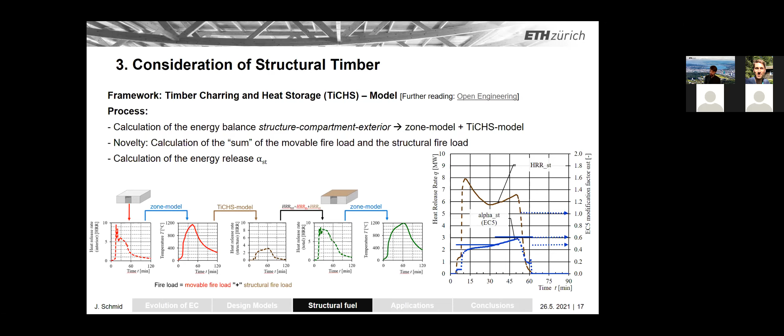You see here we have this alpha factor, and it can be simplified - that's described at the moment by Brandon. We expect we can do that also for a lot of compartments and give guidance in Eurocode at a later stage. The alpha factor tends to increase at the very end when you have char combustion, and you'll see this little peak at 60 minutes. This is either when walls kick in and we get extra flaming and it doesn't burn out, or it burns out when cooling is superior. So in some cases, this modification factor can increase above 1.

So, comparison - I know I'm late, running out of time, but give me 2 or 3 more slides. For the parametric fire, I told you the 2004 version does not work. You would get this fire for a compartment - that's test 2 of Daniel. He gave me his results, where you'd get a charring depth of only 37 millimeters, which is incorrect. Applying these 37 millimeters, you'd get increased charring and also double the time. At the very end, when the Eurocode model would say it's burnout, you would have 260 millimeters of charring, which is too much, we know, and unreasonably high.

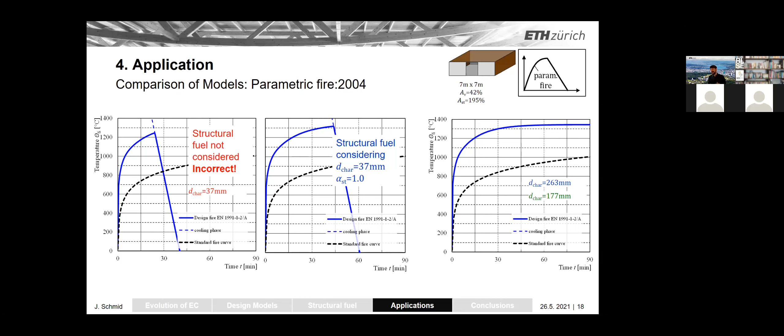Adding an additional, improved charring model would already reduce the charring depth prediction by 86 millimeters, to 177 millimeters. In fact, this model will be, or is, implemented in Eurocode already in the 2025 version. Looking now at the advanced model I mentioned earlier, you'll see the TiCHS prediction gives a value between 60 and 68 millimeters. Also, Daniel did not observe one single charring rate - people have to understand that this is a scattered value.

We have some charring in the walls, and some minor charring elsewhere. So you will have a distribution.

Looking at all results, this is measurements by Daniel, a mean value of 56. We have the prediction by the TiCHS model, the wrong implementation of Eurocode existing version, and the iterative approach with alpha 1 and an improved charring model. So as you see, there's a lot to do wrong.

And in Eurocode, we are aiming at developing these alpha values for certain ranges to be applied, let's say a square meter of compartments, residential use, ventilation conditions. That should be easy for engineers to implement. However, it's not to be used for skyscrapers.

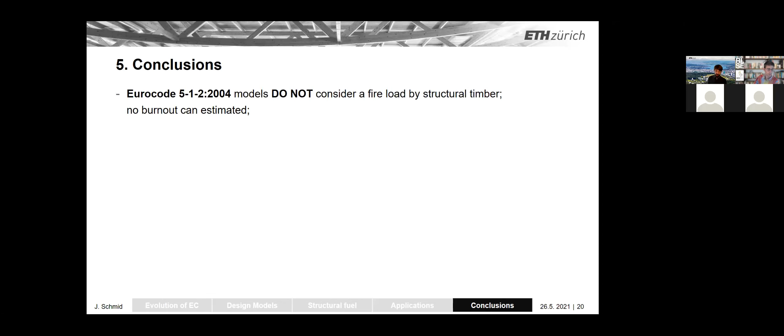My conclusions now, last slide. So the Eurocode model in the existing version does not consider a fire load by structural timber, and therefore no burnout can be estimated. The fire dynamics is a complex area, and it is difficult to cover in standardization.

So if you want to go into details, you need to ask specialists. If you want to answer roughly, I think it's feasible. Submodels, I did not talk about that too much, but those we see need to be checked if they are valid also for structural timber.

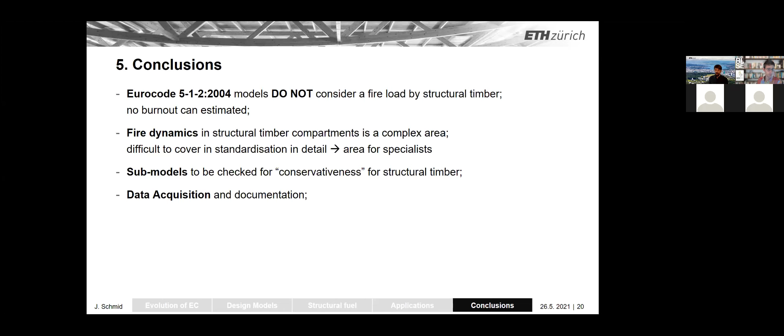Data acquisition in tests, I would like to highlight, and we'll come back to that in the World Conference of Timber Engineering Conference. The Eurocode, I can promise, will further develop until it is really published.

And yes, that was already the invitation. At the World Conference, I will talk about fire dynamics. My colleague will talk about data acquisition in compartment tests. And we have also another contribution on the robustness in fire of structural timber buildings. Thank you very much.

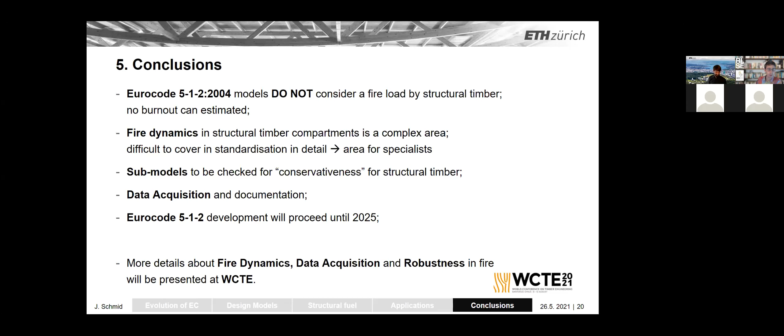Let's see, I'll do it there. Now, let's see again. And I invite Daniel and Christian to join. I think David has left us and is taking a sleep.

First question, will the videos and presentation be shared? Yeah, that's something we have been thinking about, and we will see where this video will be uploaded.